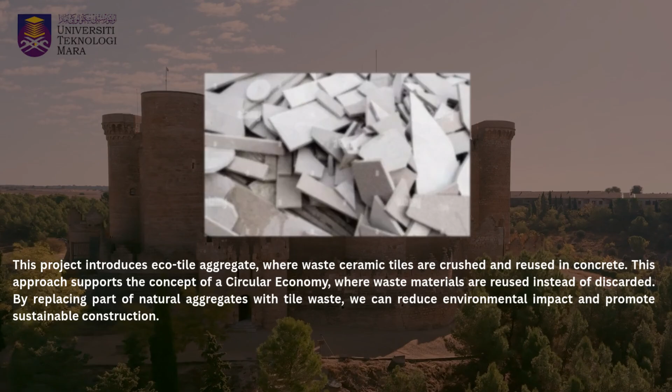Concrete is one of the most widely used materials in the construction industry. However, ceramic tile waste contributes significantly to environmental pollution and landfill accumulation. Due to its resistance to decomposition, discarded tiles remain in landfills for long periods. Therefore, this project explores the use of recycled ceramic tiles as partial replacement for coarse aggregate in concrete.

This project aims to investigate the potential of recycled ceramic tile waste as a partial replacement for coarse aggregate in concrete production. In this study, concrete mixes containing 5% and 10% tile replacement were prepared and tested. The compressive strength performance of each mix was then compared after 28 days of curing. Additionally, this project promotes sustainable construction practices by reducing construction waste and encouraging material recycling.

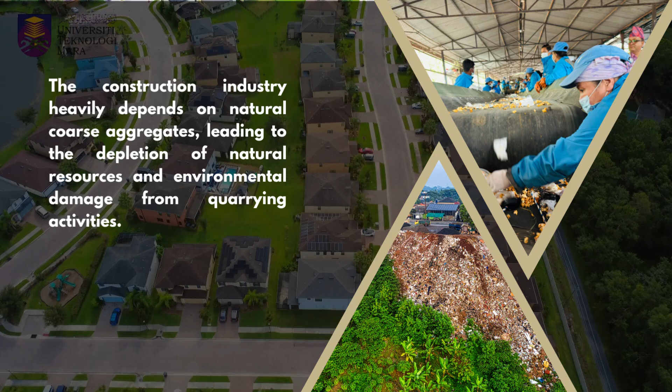The rapid growth of construction activities has increased the amount of ceramic tile waste produced worldwide. When disposed in landfills, ceramic tiles do not decompose naturally. At the same time, natural coarse aggregates are continuously extracted for concrete production. This creates the need for sustainable alternative materials in modern construction.

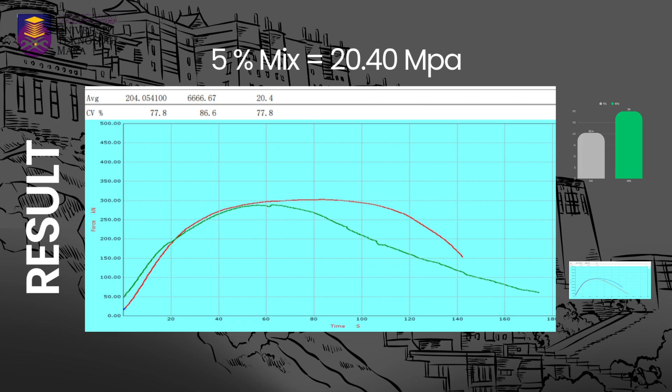The compressive strength test was conducted after 28 days of curing to evaluate the performance of the concrete specimens. The results indicate that the 10% replacement performed better compared to the 5% replacement. This improvement may be influenced by the rough texture and angular shape of crushed ceramic tiles, which can contribute to better interlocking within the concrete matrix. Therefore, recycled ceramic tile aggregates demonstrate strong potential as a sustainable alternative material in concrete production.

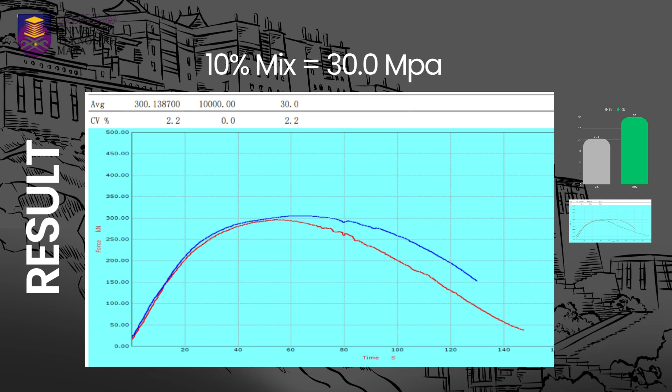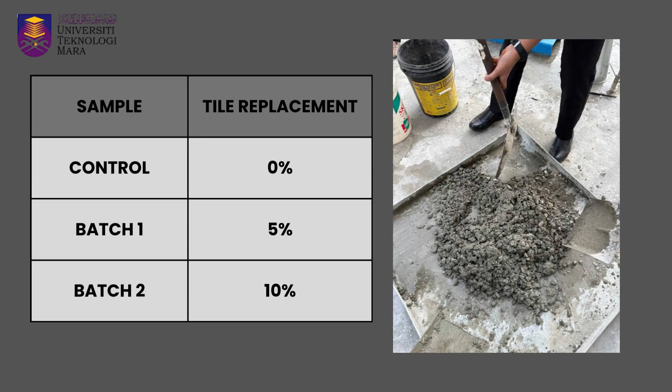This section outlines the methodology adopted to investigate the use of ceramic tile waste as a partial replacement for coarse aggregates in concrete. The materials used in this experiment consist of sand, aggregates, water, cement, and of course crushed tile waste. 3 concrete mixes were prepared. The control sample contained 0% tile replacement, while batch 1 and batch 2 contained 5% and 10% crushed tile replacement respectively.

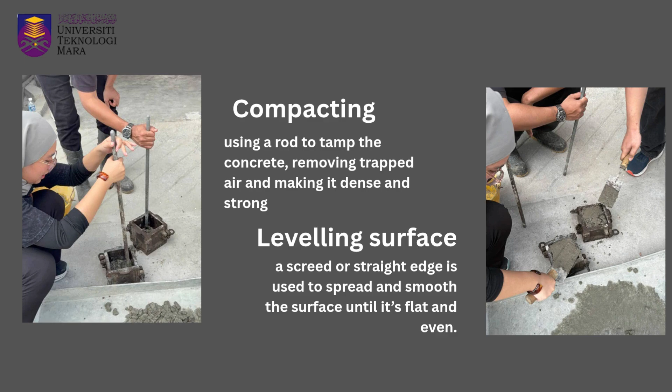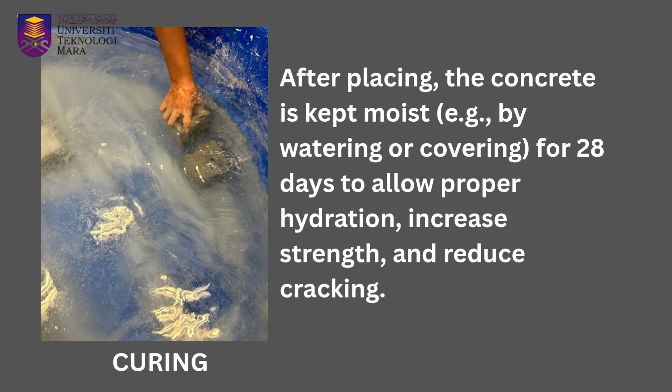Compacting is using a rod to tamp the concrete, removing trapped air and making it dense and strong. Leveling surface is where a screed or straight edge is used to spread and smooth the surface until it's flat and even. Curing is the process where the concrete is kept moist for 28 days to allow proper hydration, increase strength, and reduce cracking. Compression test is where the concrete cubes are cured and then tested in a compression machine. Load is applied until failure to determine its compressive strength.

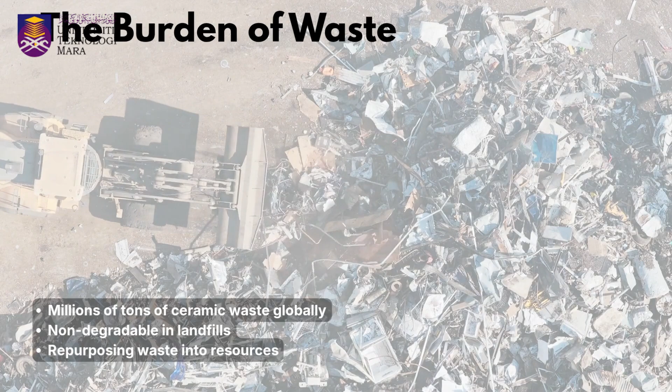Now, to bring our entire presentation to a close, let's look at the final conclusions of our study. To put our work into perspective, I want you to imagine the sheer volume of ceramic waste produced globally every single year. Unlike many materials, once a ceramic tile is fired in a kiln, it changes forever. It cannot be turned back into clay, and it won't decompose in our lifetime. In fact, these tiles sit in landfills for thousands of years. Our group looked at these mountains of broken tiles and saw potential building blocks for the future.

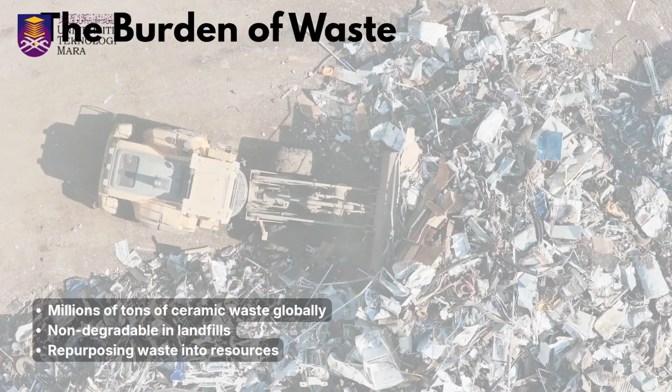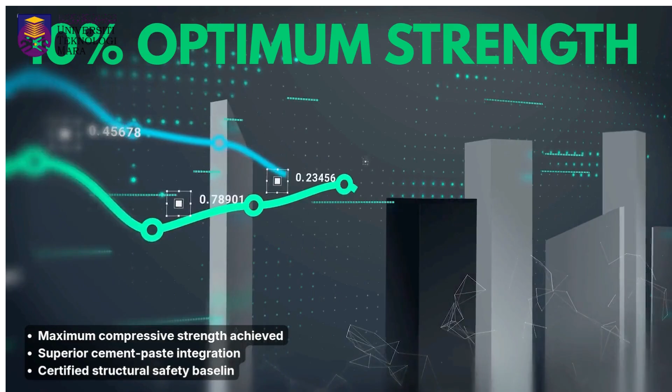In conclusion, our research has successfully proven that recycled ceramic tile waste is not just waste. It is a high-performing, sustainable alternative in concrete production. Through rigorous aggregate substitution, we explored how this eco-friendly material can effectively preserve structural integrity while offering a green alternative for the construction industry. Through comprehensive cube testing and data analysis, we identified a critical sweet spot in the mix. Among all our tested samples, it was the 10% replacement level that achieved the most superior compressive strength performance. At this precise percentage, the recycled tiles integrate perfectly with the cement paste, maintaining structural safety while maximizing sustainability.

Ultimately, this study is about more than just concrete cubes. It's about a paradigm shift in how we approach civil engineering. By adopting this 10% replacement standard, we can divert millions of tons of ceramic waste from our landfills and significantly reduce the carbon footprint of the construction industry. We are proving that through innovative engineering, we can build a world that is not only structurally sound, but also environmentally responsible. This is the future of sustainable construction.